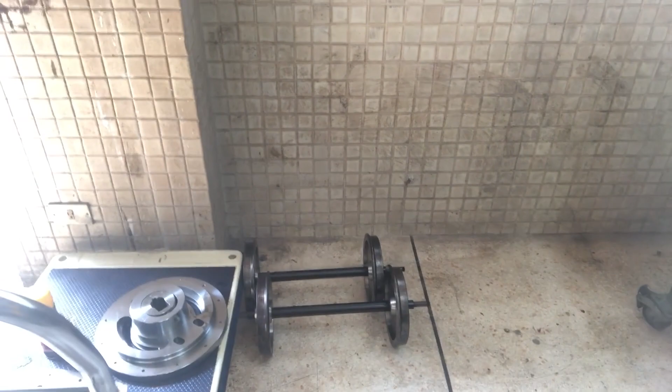And here on the floor we have some other parts waiting. And as you can see, very cute little wheel sets, railway wheel set for a quarter scale. If I'm not mistaken, it has been a few weeks now, or months even, since we finished the engineering design. So today is the big day.

We're hoping that pretty soon our friends from the SCHAEFFLER company will come. That will be actually one of our students, one of the MESD students who is doing an internship there at the moment, together with a technician. And we're asking them to help us with the assembly of this beautiful, where is it? This beautiful shaft right next to the Imperial Stormtrooper's helmet into this housing.

And this is something that I've asked for help for because we have tight fits on the shaft. And it's an O arrangement, step bearing arrangement with 2 tapered roller bearings. I don't feel confident without proper tools and experience to assemble it without over tightening it, because pulling it off is close to impossible. So we'll see how that works today.

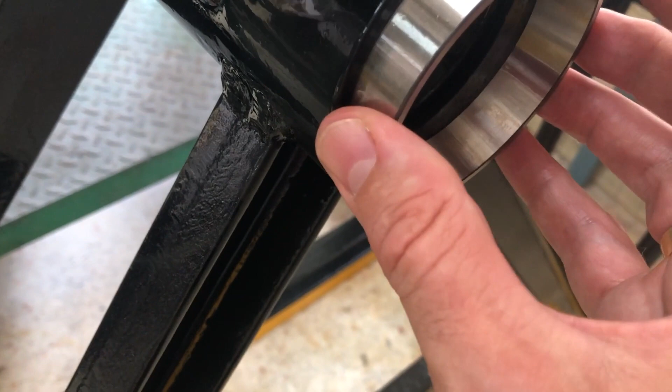So this is the bearing for the big shaft. Of course it looks very big on the screen now, but it's not that big. It's 40 millimeter shaft diameter. Tapered roller bearing, of course you can take it apart. So just take a look at the housing first. The plan was to have a very loose fit in the housing. Still, loose fit doesn't mean you can just throw it in, but this is where it goes on both sides.

And here's all the other parts. FAG bearings, of course, right? Of course. Can I see your jacket? SCHAEFFLER. Yeah, now we're talking.

So, can you introduce yourself, please? Okay, my name is Anuch Leelasettakul from the Thailand team. SCHAEFFLER field service engineer from SCHAEFFLER Thailand. So wonderful. We have support for Dr. Alex. Yeah. Right. Well, for mounting the bearing. SCHAEFFLER has been supporting us for many years already, and I'm very thankful that you are coming here today with our student. Come here. Can you introduce yourself too?

Hi, my name is Khemapat Tontiwattanakul. I'm studying at TGGS at King Mongkut's University of Technology North Bangkok, and now I'm doing an internship at SCHAEFFLER Thailand. Ah, very good. That was a good introduction. So you have a logo too, but it's not SCHAEFFLER? No, KMUTNB, yes. With your name on it. Fantastic. Okay, great.

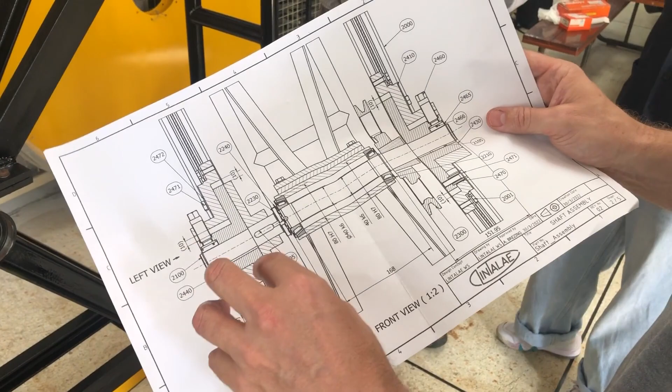We have a lot of equipment coming from SCHAEFFLER. We have a lot of equipment from ourselves, so we should be doing fine today. So we're just planning how to put it in. It's always very embarrassing if you assemble something the wrong way. Our design here is almost symmetrical, but one side has 2 adjustment options. So we decided we're going to put this side on this side, so it's easier to access the adjustability.

So we were just talking about the assembly, and we have, of course, 2 tapered roller bearings for step bearing arrangement, O-type. It's adjustable on one side with a groove nut.

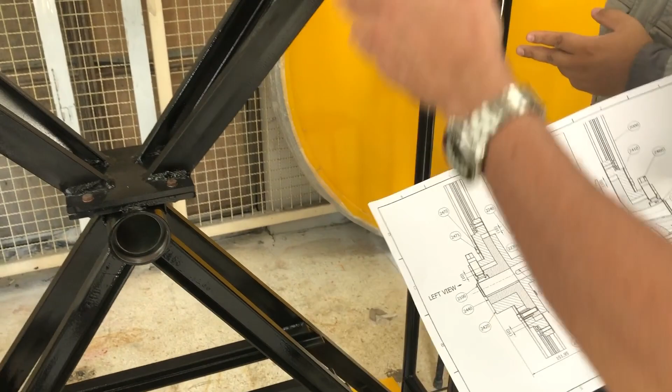And this is going to be this side, right? Which is nice too, so you don't always knock your head when you adjust it, right? Because on the other side we have the frame there. And we were just talking about the best sequence of assembly.

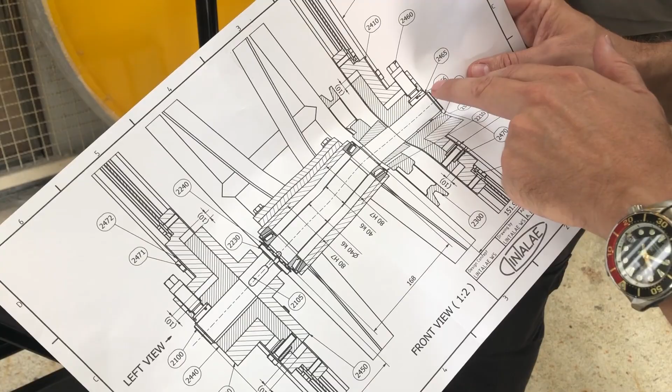So the right bearing is leaning against the circlip on the shaft, and what can't be seen here is there's a Nilos seal. So you agree with me, we should first push the inner bearing ring onto the shaft from that side, because it's a tight fit, it's not easy to find the right position, so we'll probably push it a bit too far, then we put on the seal, then we put on the circlip, and then we probably have to try to push it back again.

And then we continue here, we put the two outer bearing rings inside, right? Then we put the shaft in from the back side, and then the party starts. Because then while everything is in there already, we have to put on the other bearing from this side. Do you think you have to heat it up for that? Just check a little bit.

On this side the bearing, you can mount it with a mechanical force, it's possible with a bearing, but it's not good for the shaft. Yes, that's what I'm talking about. But you're the expert, so I'm going to let you decide. But if the bearing is too small, the heating is not possible, because the small bearing cannot expand enough to fit on the shaft. So let me check it first. So it's going to be exciting. See you later.

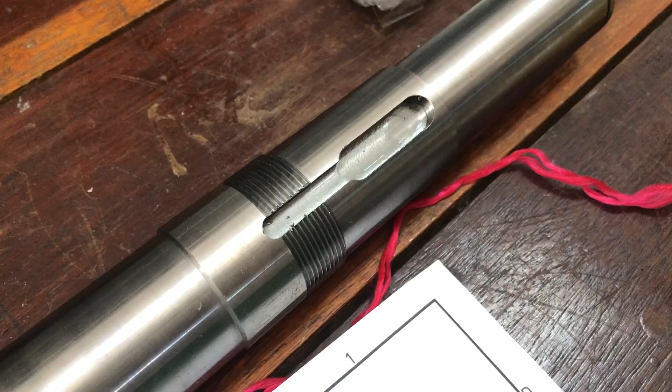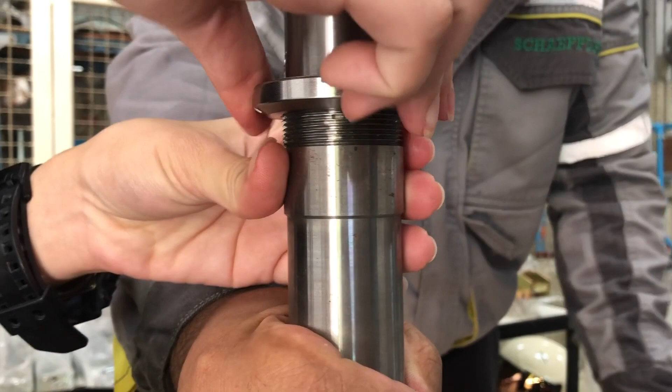So this funny chamfer has to be on the inside, because this is where the lock plate goes later on. Washer. Lock washer, lock plate. With this chamfer. So the thread is looking good, right? Yeah, it looks like the thread fits. All the way through. Okay. Right to the end, just to make sure it really works. Otherwise, it's very embarrassing later on. Okay, great. Leave it on. Of course, in real life, we don't want to tighten it up that much.

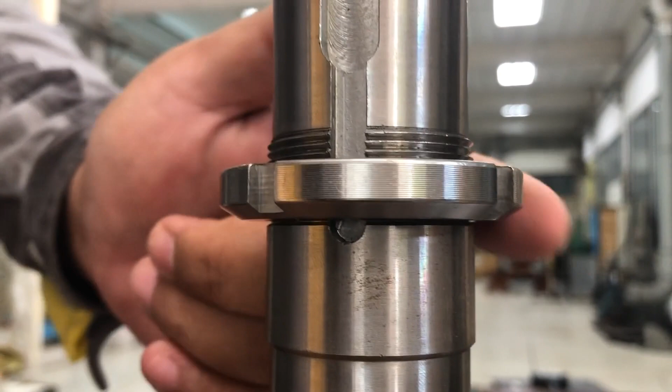You see the groove there. This groove is for the locking plate, or what did you call it? Lock washer, right? Lock washer. So the professionals call it lock washer. I just call it a lock plate. You see, here it is. It has the latch on the inside. That will be in this groove. So here it will be under it, and this is why we know that we can't tighten the nut as much as we put it on before. Hey, you can open this one too and put that one on, just to make sure we have the right parts.

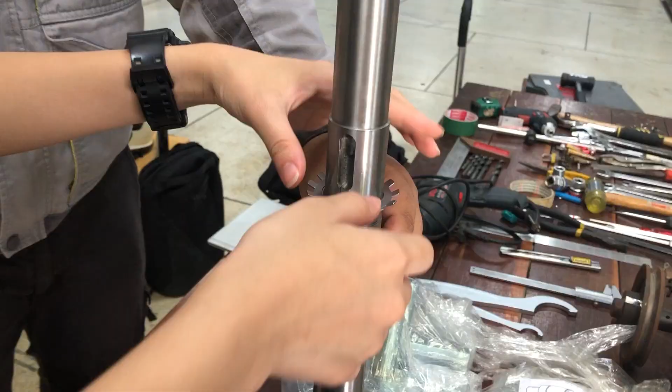That looks good. It has to go over the thread, right? So I hope it's big enough. What's happening? That's a bit tight, but it's possible, I think. Squeeze. I want to squeeze it.

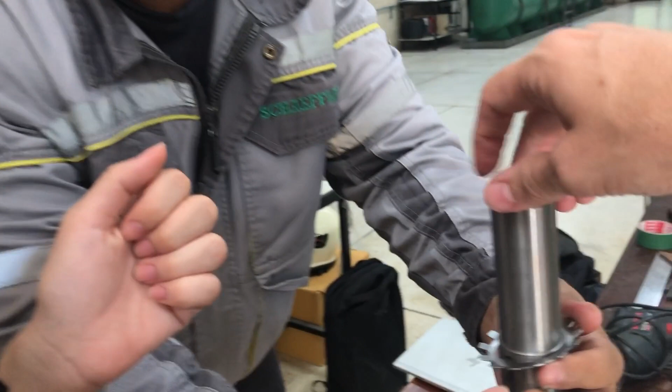So here the groove is okay. The depth of the groove is good, but the diameter of the thread outside is a bit. Oh, you mean the width? The width. That's no problem. We have a file. We work on the lock plate a bit. Well, we did all according to Tabellenbuch Metall, didn't we? Yes. Of course. But in real life, everything is too tight. Let's see.

So we already let the file work on this one. Now we can slip the lock washer down the groove. We did everything according to the, as I said, Tabellenbuch, but still. There you go. Thank you.

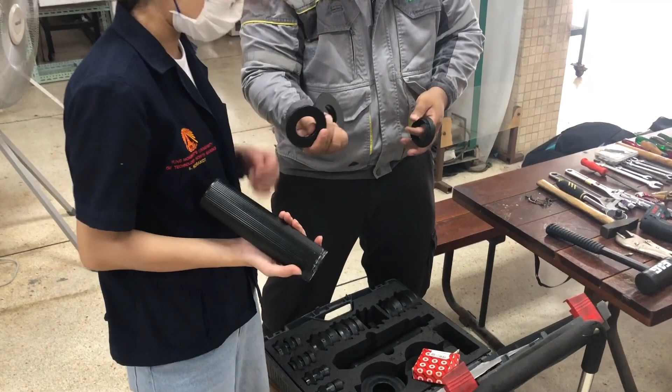So I think by now you can tell that we're all really scared of pushing a bearing over a shaft with a tight fit. Normally you can heat up the bearing to make it a bit bigger, and this works well with bigger bearings, but they say that with the smaller bearings, anything smaller than 50 shaft diameter, it will not really work. So this is why we're using other special tools.

What is this called, sir? Fitting tool. Fitting tube, right? Because that makes sense. We prepared one for ourselves because this is a 1.5 inch PVC, right? That also works, but of course PVC is not very sturdy. So this is the professional kit that the professionals use. Okay. So here's that.

It's the actual inner diameter of the bearing. So even with the tolerances, it can be a bit bigger, right? Like a little bit bigger, so it's not touching the shaft, all the way through. And the outside is the same as the outer diameter of the bearing, so you can fit the outer ring.

It's also a loose fit, right? But it's not just put it on, we just hit it a little bit. But for now, we'll just put in the inner ring. And of course, the inner ring can't be separated from the rollers, which makes me nervous too, right? Something more that can break.

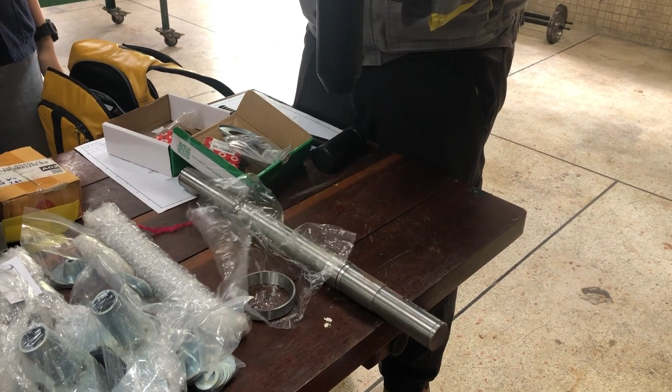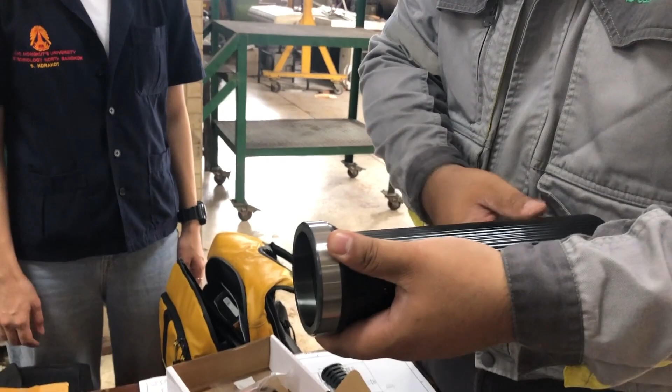So here's the inner ring again. Okay, let's see. There you go, this is the side, the diameter, there you go. And also you can fit the outer ring into the housing. One fits all, yes. Wonderful, let's do that later. The outer ring doesn't scare me.

So we're just talking about putting some grease on the shaft, but you have something better, right? So this is called mounting paste. It lubricates the shaft like oil, like grease. But another thing it will help with is preventing fretting corrosion.

That sounds like some kind of failure to the bearing. Yeah, we know about fretting corrosion, but I'm wondering how can grease do that? Sounds like some magic from TV advertising. Okay, we'll see, I'll disassemble it in 15 years and check.

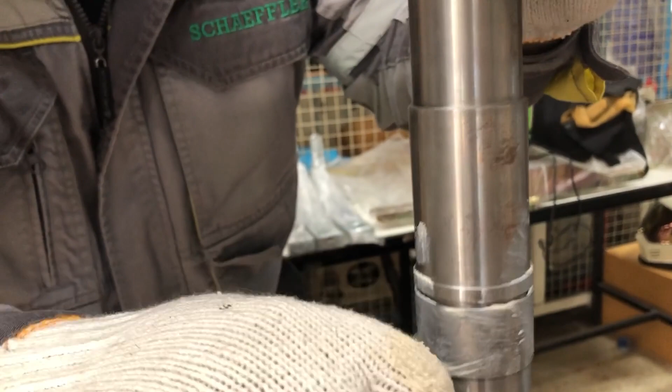So the bearing will sit around here. Yeah, the bearing is under that, just slightly, not that much. Also put some before, like over the... Yeah, because this is where we have to slip over, right, at the sitting area. Yeah, right, because all this has the same tolerance. Probably just a little more.

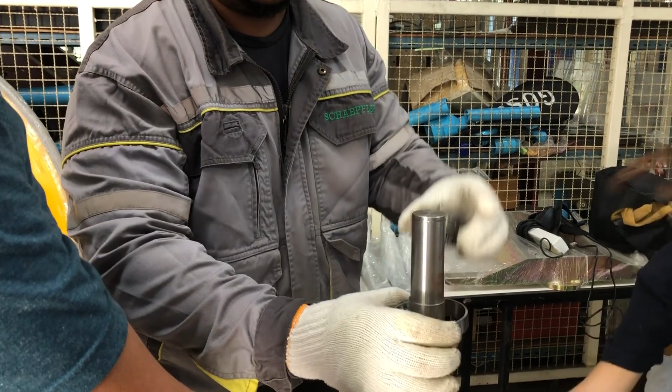So this is where it can get very embarrassing, right? This is O-type, right? So if you put that, it would be a big mistake for O-type. That would be nice for X-type. Yes, this is how we want to do it, right? The outer ring will go like this. The outer ring in the housing will be like this, right? Exactly, but the outer ring will go with the housing. We'll put that in the housing later on, right?

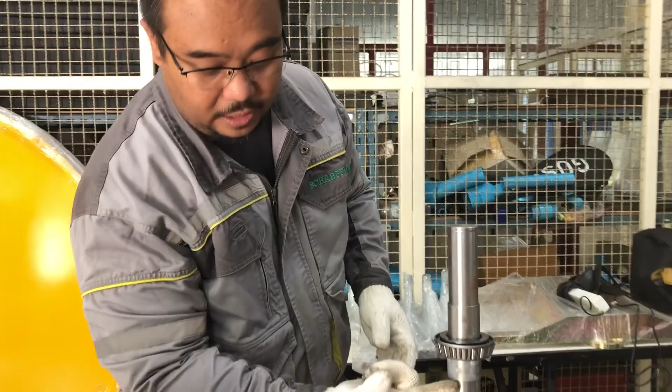Great, it's going down, right? It's going down, going down already. I was having nightmares about this for many months. Moving much better than you thought, right? Yeah.

So now this is a design flaw. At the moment we cannot tell where we are. We have to wait until the circlip groove comes out on the other side again. So let's check, let's have a visual check if we can see the groove already. Not yet, not yet.

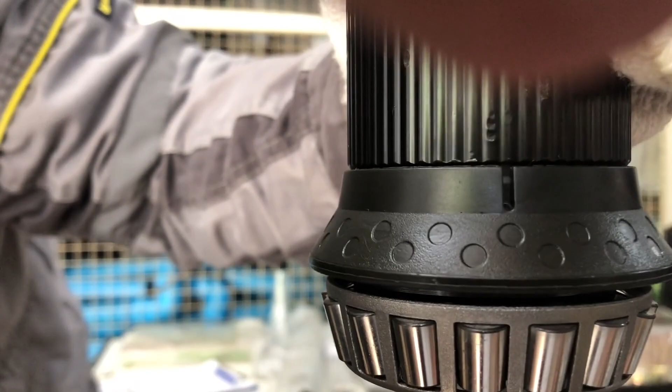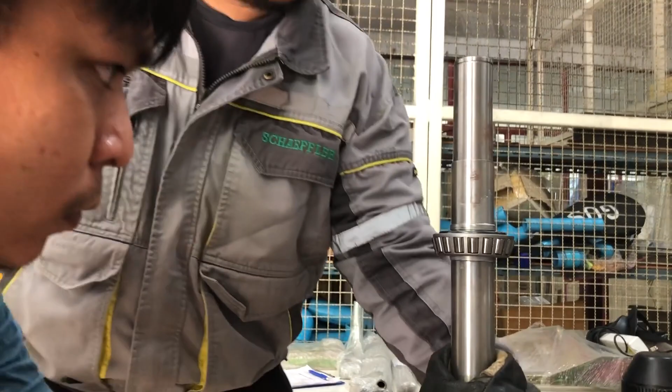Thor and his hammer, sure. Okay, we can see it, but not the second shoulder. Yeah, we can see the groove, but not all of the groove area. So just a little nudge, we just needed to go past that groove.

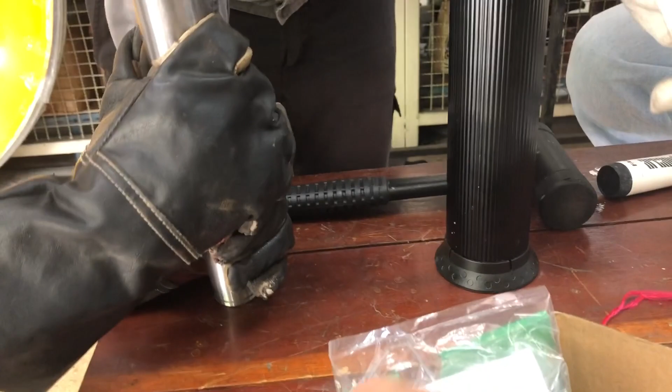It's enough for the Nilos ring, which is around 0.5 millimeter. So here's the Nilos, beautiful thing. Fantastic technology.

And I suggest if we can already fit the circlip, then we're happy for now. Okay, let's try the circlip.

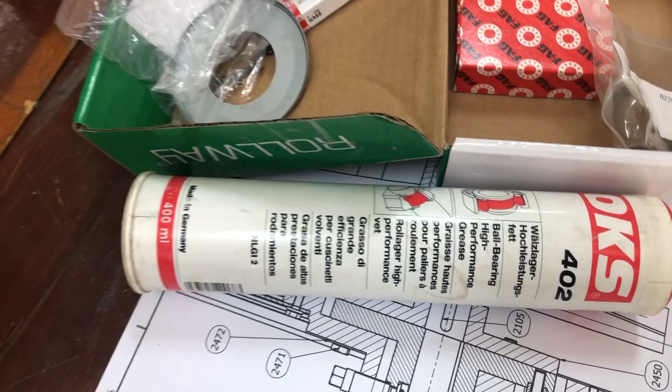So before we put the seal on, I suggested we should already fill the seal with grease. Now obviously we don't have the perfect grease, right? The perfect grease would be the original SCHAEFFLER grease that SCHAEFFLER put into the bearing, but we don't have that. But this one is good enough, this is my home workshop standard grease.

Yeah, but in this situation, it's not the main grease that will lubricate the bearing, so we just put slightly grease at the seal. Okay, go ahead, all the way around the bearing. You're the grease master, go ahead. Okay.

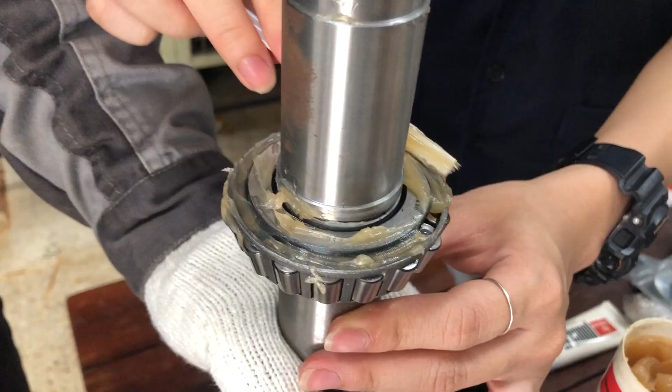So we just heard some inside knowledge about flushing direction, right? So these bearings will actually kind of wash or pump the grease to the outside against our seals, which is not so bad. Well, for now, because we don't have a lubricating nipple in this design, just put as much grease as possible in there, even if it doesn't look very nice.

And we're using SCHAEFFLER-specified grease spoons in there, which we just got from the coffee shop. They're highly standardized, so they're available everywhere.

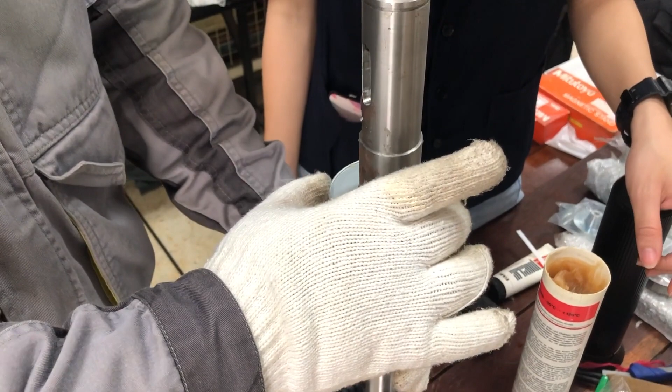Now the circlip. Where's your special tool? One of these guys goes on now.

Our BMW expert from Nonthaburi brought his own tools. This is how proper engineering works. Everybody brings their tools from home.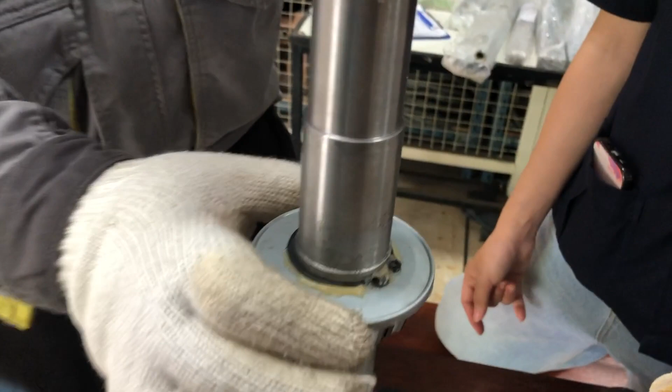Same, right? The outer ring looks the same. The bearing number looks the same, but you have to pair it up with themselves, with the original one. So we're about to put it in the outer ring in the housing, and we just got a warning: we shouldn't confuse the two outer rings of the two bearings, because we have a sorting process. The bearing size, the rolling element, is not perfectly the same size, but it's in the micron, very very small.

Right, okay, so we matched it. Sorting it first and matching the bearing to be one pair of bearing. Okay, so where's this thing gonna go? This thing must go on this side then, otherwise we will have confused it. Come in here.

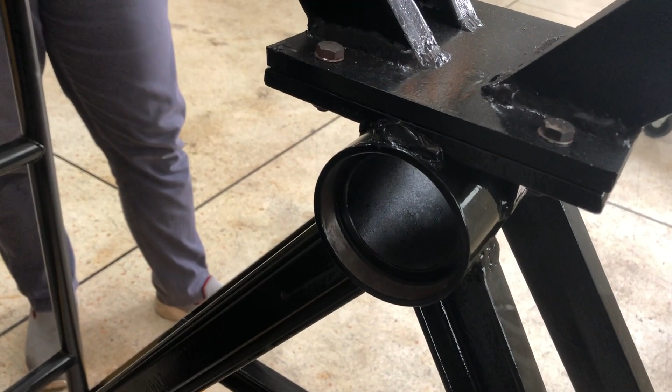You want a transition fit or slightly loose fit. It's a loose fit, yeah. But for sure the loose fit is not that loose that you can put by hand. You have to come... you can see it. You cannot throw it from 1 meter distance, right? You actually have to come close to it.

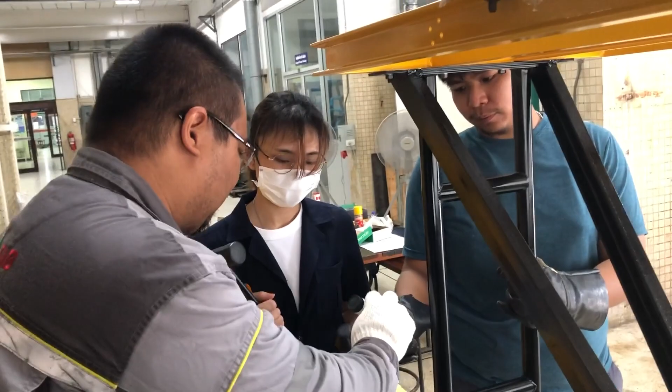It's on this mounting paste again. Mounting. Okay.

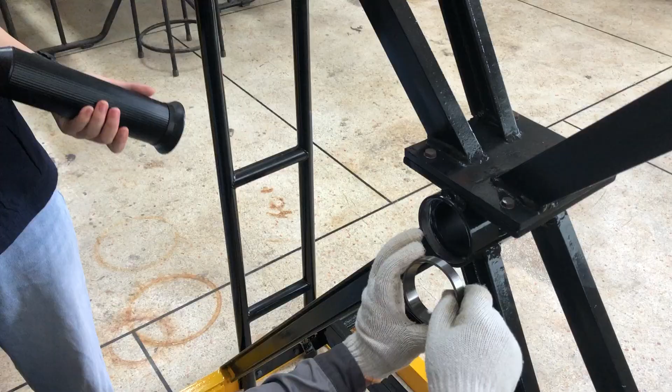So this is the so-called loose fit. In mechanical engineering, a loose fit means you can push it in with only slight force.

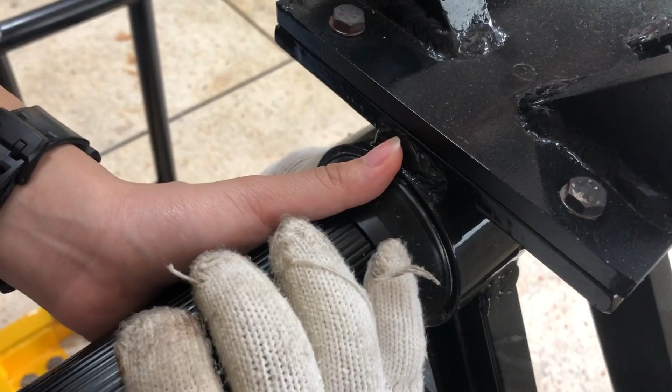Just go all the way to the shoulder. And this one has a shoulder. Go through the way.

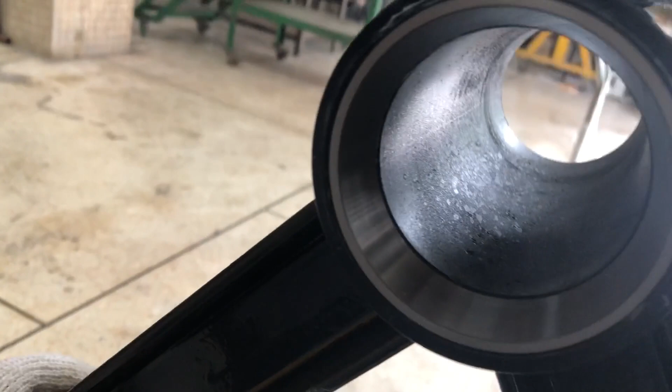Okay, I think the same way. Number two, we got it in the right way? Yes, for sure. Not like this.

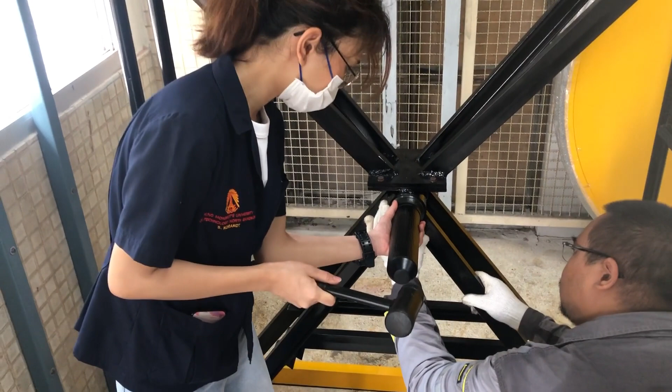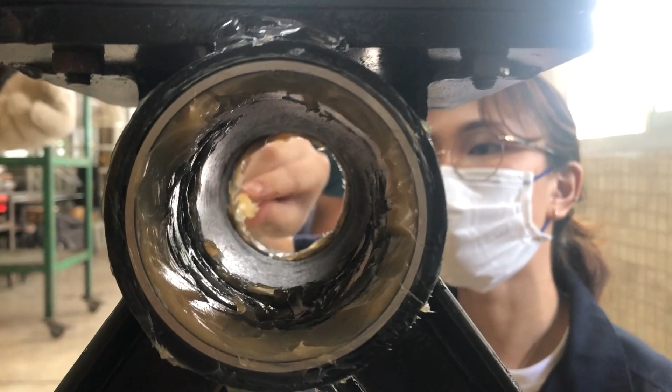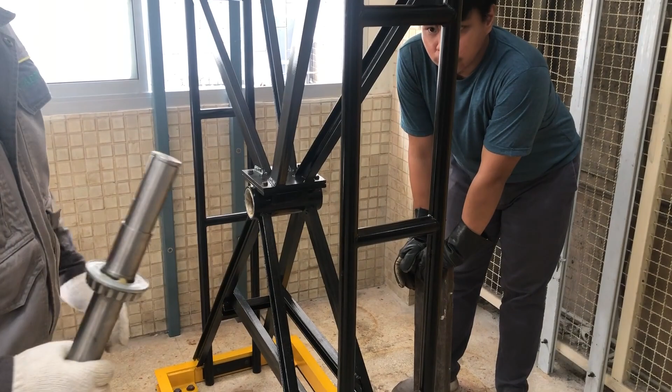So here's the next critical situation. Because we have to push the shaft in with one bearing from the side, so there's a good chance you can damage it. For example, you could damage the race with this. If you hit it, that would be bad. Or you could damage the rollers. So you have to be very careful now. Careful, don't touch the race.

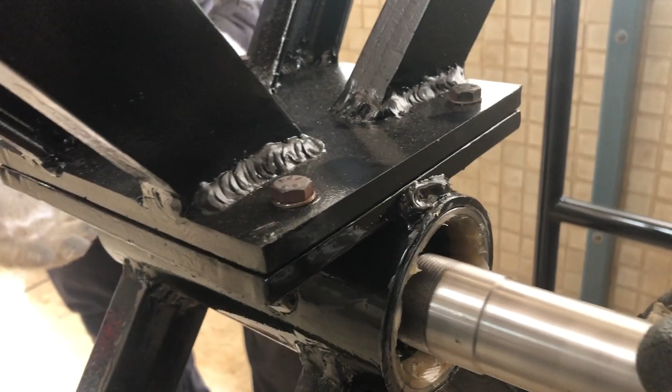Okay, that was good so far. Good so far, good so far. Okay, now we're almost safe. Very good.

Of course, now the problem is when we mount this, it will have to be struck with a hammer again, and all this hammering force has to be supported by Khemapat here. So, what body part will you use to support the hammering force against the shaft? Just a finger, because you had a good breakfast, right?

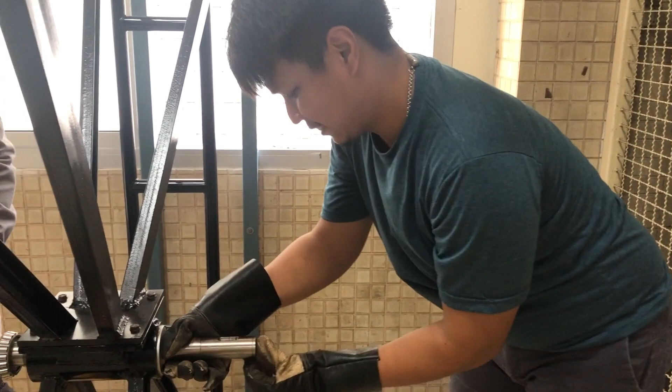So normally I would expect this to go easily over the thread, and now it does. Okay, that's not too bad. And here's the tight fit part, so we have to use the mounting tool and the hammer.

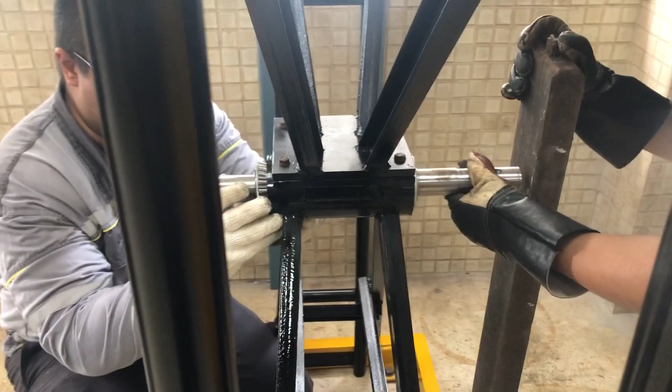Okay, now this is the other bit which made me sleep bad. So you see on the right hand side, trying to support the shaft, not with the body part. I thought you wanted to support that with your forehead. No.

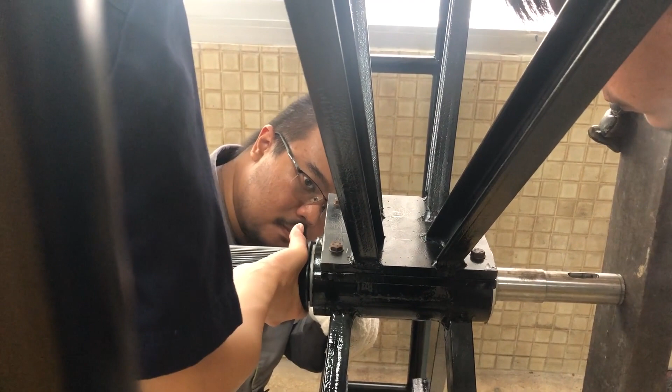Not a preload, but... wow, it's already sticking with the grease. So we can't feel any axial play anymore. So both bearings are already hitting each other, but there's no preload yet.

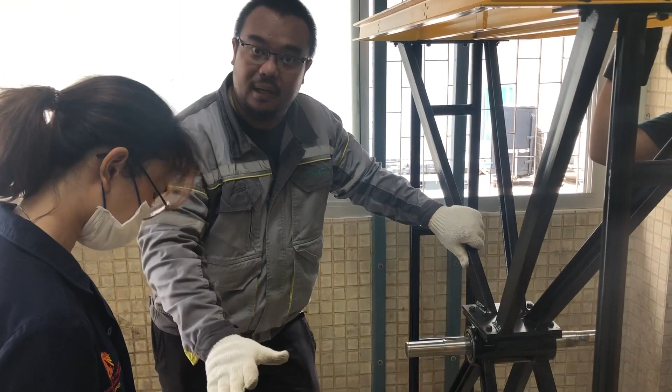If you have to get the preload, we don't do it with the hammer. With the lock nut, right? Yeah, we do it with a lock nut. This is enough for now. Wow, I'm so happy, now I can go to sleep again.

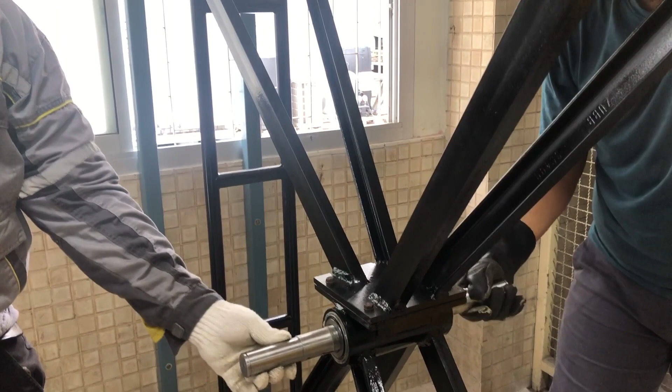So just turn a little bit to flush the grease. Putting on the seal. Yeah, it will be pushed against it.

Now the lock washer and the lock nut. Also, you would like the preload, right? The lock washer almost every time gives you a preload because you have to select the right column, and you have to tighten it up again to select the right column, so it will make the preload situation.

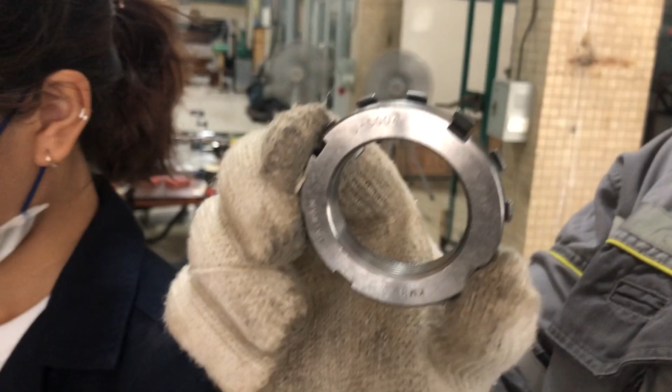Here you see the lock plate has many latches on the outside, but the lock nut only has 4. That means when you found your perfect tightening, it will never fit. So typically, statistically, you have to tighten the nut a bit more until one latch fits the position of one of the 4 grooves - that's what you meant. So in effect, you always have a little bit more preload than you bargained for.

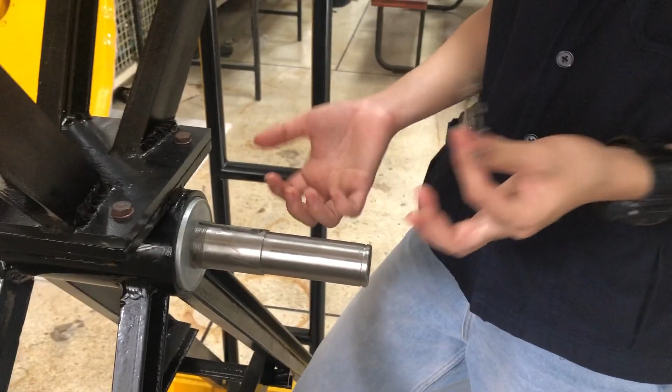So let's put that on now. Again, it's not 50-50 chance, you have to find out how to put it on. Otherwise, let's see. Okay, right, you helped her. Okay, there you go.

So actually this design is a bit confusing. This is not for a feather key, but this is the groove for the latch of the lock washer. So that's nice.

And then the lock nut or groove nut has this chamfer on one side, which matches the angle of these latches on the lock plate.

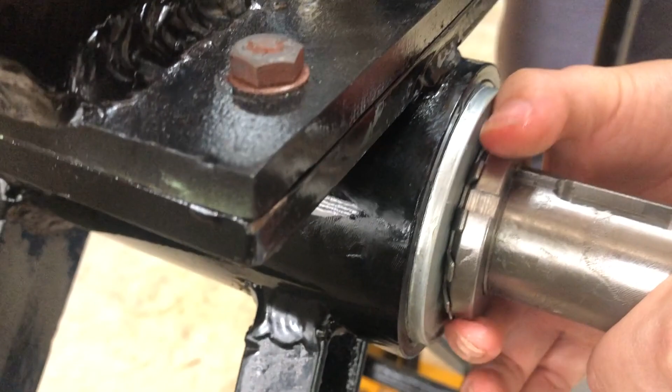So it always reminds you which way to put it on. And then keep in mind, later on, after you carefully adjusted it, one of the outer latches will be bent down into it. But you cannot tighten it up now because you have to lock the shaft so it doesn't rotate. Right, you cannot let the shaft rotate.

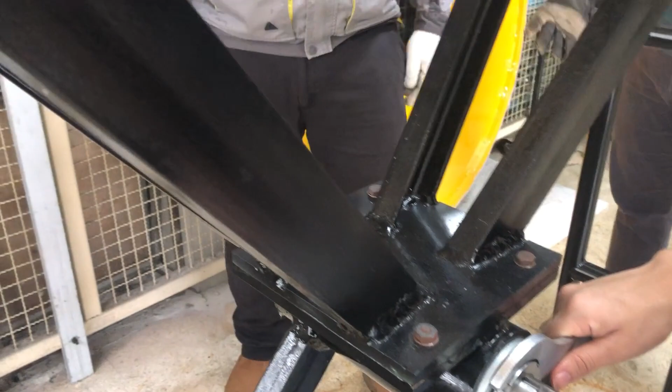So this is a problem. See, when you're trying to tighten the nut, the only thing that will happen is that the whole shaft will rotate. We might be able to do that when we put on one of these hubs with a feather key, then it will be much easier to hold it.

Understand? Yes. Do we have the feather keys here? The key is not here - the feather key is in my office.

At this point we took a little break. I fetched the feather key and we assembled one of the hubs we had onto the shaft with a feather key, so we would have the grip to counterbalance the tightening torque. You will see the feather key under the groove nut in the next clip because we didn't quite push the hub all the way up. So normally it's not exposed, but in this case it's quite educational - you can see it.

It's not easy to make an absolutely accurate measurement, but at the moment it feels like it's already tightened to have 0 axial play. But we want a little bit of pre-tension, so we decided very loosely that we'll just tighten the groove nut a bit more until this groove matches this latch. We don't know what it means in absolute terms - we call it just a hair of pre-tension. Is that correct? That's the technical term.

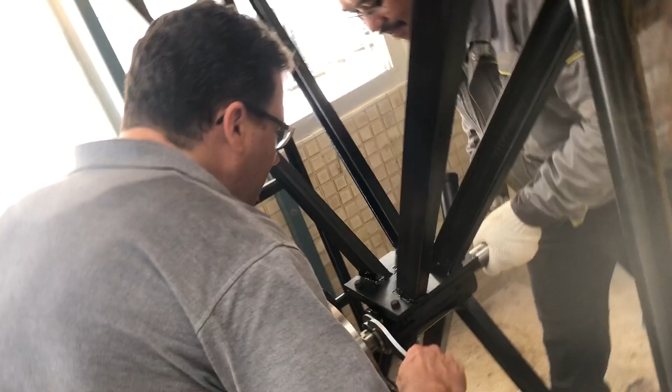Sure, okay, hang on. Yeah, this is the one. So we try to tighten this a bit. Okay, applying torque. Very good.

Applying torque, we're closer - I'm hitting it with my wedding ring. Applying torque now, oh, we're practically there. If I do more, I will go too far. Just a hair.

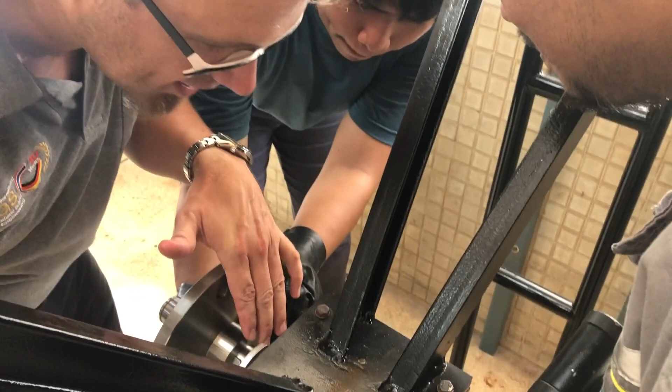A little more. Okay, now just the hair of a hair. Applying torque. I don't see a difference. Yeah, just a little more. Okay.

Now we see, because this is an educational video, right? So now you see, dear students, that we can bend this ledge down into this groove. If you look at all the other combinations, they will not match. And this is the great design. There's an uneven number or odd number of ledges, so you get as many possible or fine positioning here, because you don't want to adjust it to have a specific tension and then disadjust it just to find the position. So here we are.

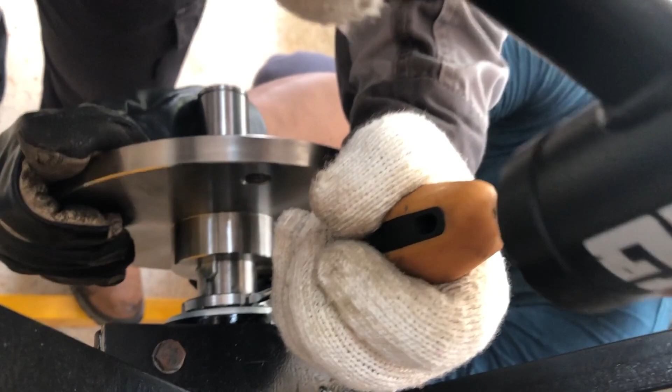This one will now be bent down. So to bend down the ledge, in the lecture I always say it's a screwdriver, but of course it's not a screwdriver. This is a specific SCHAEFFLER specification lock washer down bender. It can only be used with an FAG hammer. You see that?

Oh, out of focus. Hang on. Is it down? Yeah, this is enough. This is it. Now this specific ledge bender, this is very expensive, right? It's hardened steel. You can only get it through certified FAG dealers. There you go.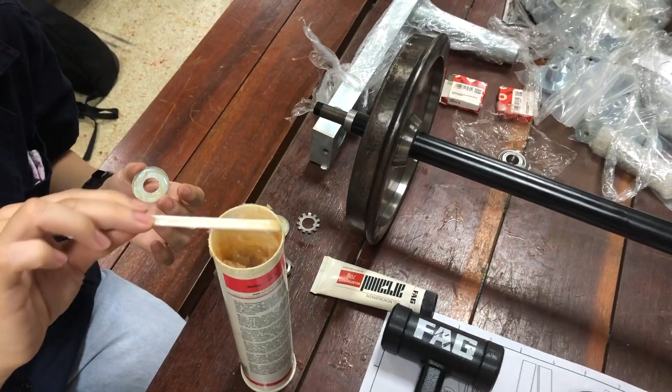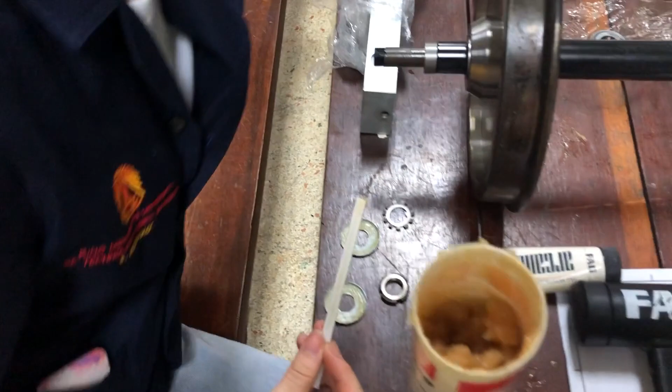So the second part, our quarter scale wheel sets. This is standard gauge, or a quarter of standard gauge. Everything scaled down. So instead of the typical or normal roller bearing on each side, we have pairs of tapered roller bearings. So, can't show you the bearings at the moment, but here are the little boxes with them. Just finding the mounting tools over there, and already applying grease.

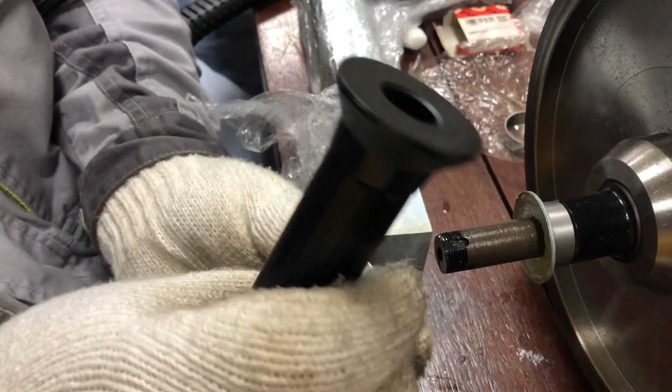So, even with professional equipment, we ran into a problem that the professional fitting tool is too big to actually push it from the small side. So we were lucky to find something in the storage here, and we're hoping it will not explode. So we don't have to exert force to the cage, the bearing cage. Yeah. We need to exert force only to the ring. And the tool is running away already.

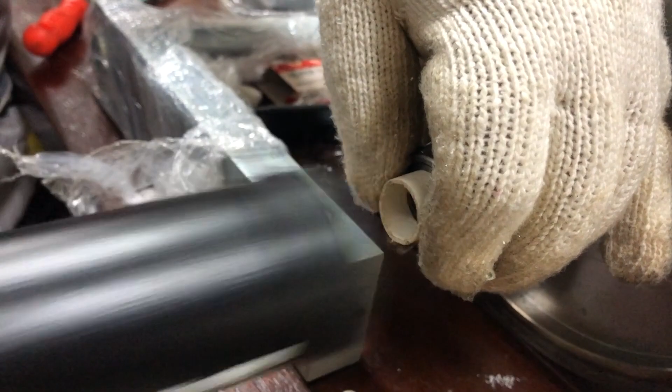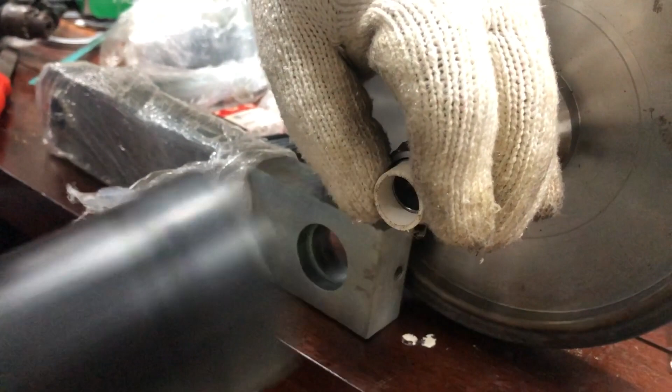So, a little slide rod. Let's see. And first thing, we have to hit only the tool, not the fingers. I will try that. That's so small. Very small. Like that. Let's cut further to this side. It's getting in. Wow. Further.

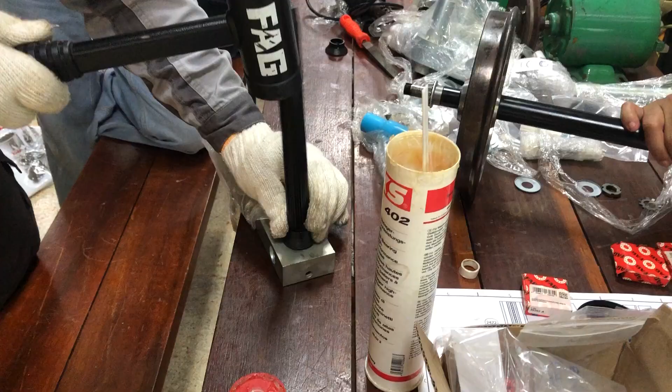Outer ring assembly not as fun as it should be. We guess the zinc plating has made the fit much tighter than originally planned. But this seems to be okay now, right? Yep. Okay. All the way to the shoulder. It's quite a drama to put all the parts together. Oh no, we might have to hammer again.

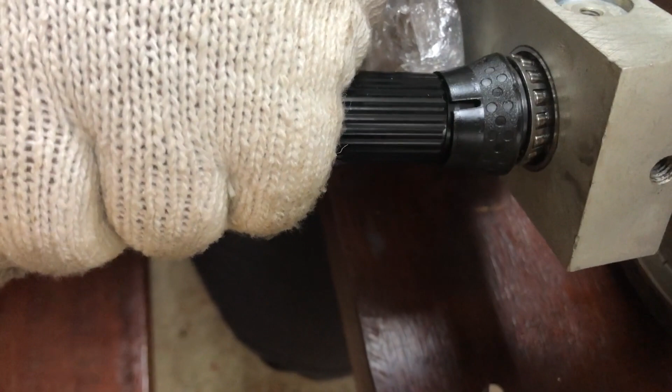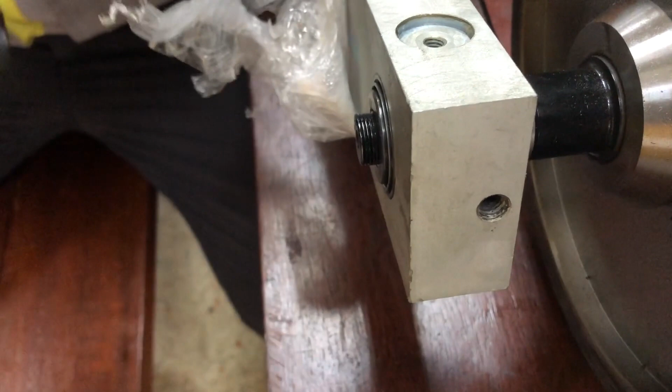Yeah. See, there's still the clear line. Yeah. You want to do the rest with the screw? No. Okay. Just a little bit. Yes. Here. And we will tighten it up by the lock nut. Yeah. Okay.

So with all these operations we were careful always to mate the outer bearing rings with the inner bearing rings and the roller sets, because we have 4 of them and we're trying to save time by assembling on both sides simultaneously. There's quite a high risk of confusion. I know. So where are we?

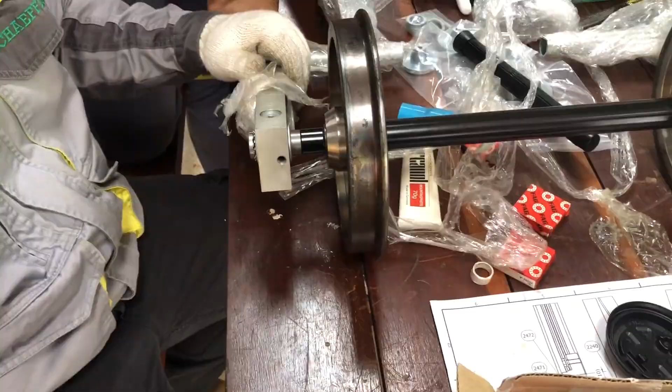So this is of course different from the real train, because here we're basically assembling the suspension around the wheel set. That is not the normal way. Yeah. So our expert finds this is tightened just the right amount, and I agree. I cannot feel any motion with this long lever and not too much friction either.

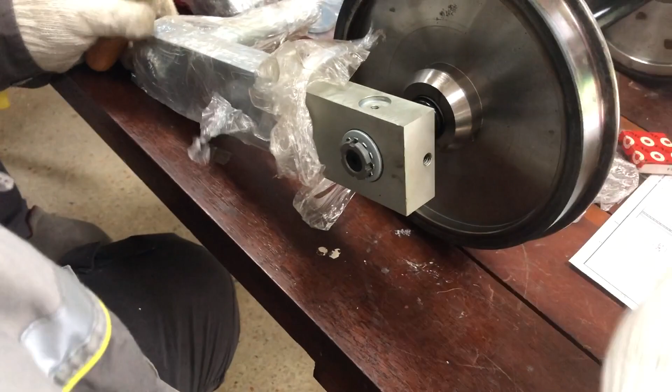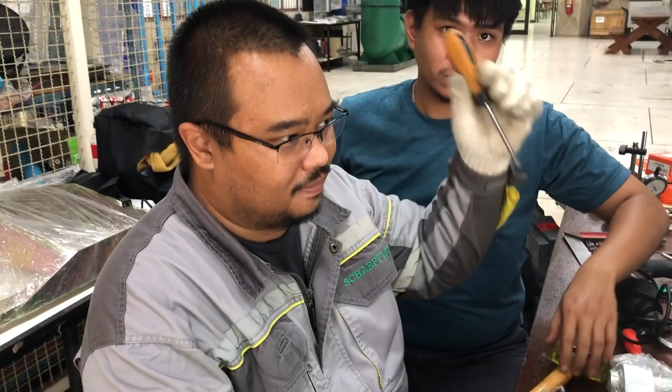So now we can lock it if there's any latch matching. Do you see one? The top one fits? Oh yeah, lucky. Okay. Don't forget to use only certified SCHAEFFLER screwdrivers for this job. So this is the end of the assembly activities with regards to the bearings.

Thanks to SCHAEFFLER again. As the final clip, I would like to show you something I recorded weeks later when we finalized the complete assembly. So what you're seeing now is the assembled model of this bogie, quarter scale bogie, running on the 2 track wheels which replace wheel tracks. And as the electrical wiring of the motor wasn't finished that day, we have poor Pirat turning on the big wheels instead. But I think it's enough to demonstrate what all of this is about.